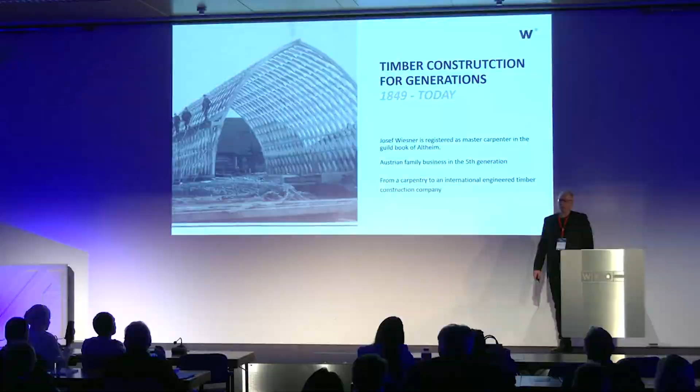We name ourselves the pioneers in timber engineering, simply because we are the pioneers in timber engineering. We've done that for 175 years, and we are now in the 5th generation. We started as a small carpentry, and now we act worldwide with the hugest, largest timber structures in the world. We are still in a small village in Austria, working from there and serving all around the world. We've always had the luck and the capability to make the most impressive timber structures in the world.

For instance, that one built in 1966. It's still existing. It's an exhibition hall in Klagenfurt, Austria, and it has a free span of 100 meters, which was for a long time the longest free span in timber structure in the world.

Then we made a lot of other new, crazy projects that you will see afterwards, which led to the decision to make a new line for our factory, because we realized timber goes also vertical since a few years. In former times we talked about long spans, huge sports halls, things like that. But since a few years you can make skyscrapers, high buildings made of timber, and that led to our decision to make a new line for this kind of product.

We have a quite holistic approach when we talk about timber construction. So we're not only a manufacturer, we help architects if they come with a sketch on a napkin and ask, Johannes, is that feasible? How much does that cost? We help them. And if that sketch looks at first very brave and almost impossible in timber, we are even more motivated. We like that. We like, in a positive way, naive architects who make their lines, and then the industry has to solve the problems, because if we always make what we already know we can, it's quite boring.

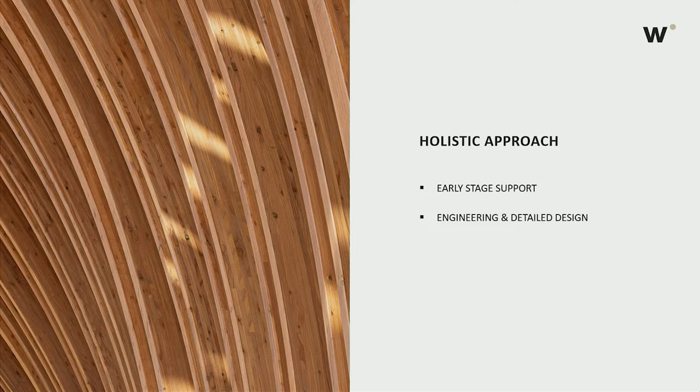It normally takes a few years from the first assistance to engineers or architects until we really secure the contract, the order. And once we have that, we do the full structural analysis. We have in-house engineering, 25 people working on the computer doing the structural analysis and the fabrication model. We manufacture the elements, handle project management, ship it wherever you want, and install it too. So that's just to give you a picture of what WIEHAG can do.

But why build in timber? We are in Austria, in Vienna. In Vienna there are probably not too many trees, you haven't seen too many, but 48% of the area of Austria is covered with trees, with forest. So that's a good base. And Johannes already talked about CO2 emissions and the building environment.

12% of the worldwide CO2 emissions come from building materials. That means it comes from cement and steel. So that's quite a lot, especially if you consider that all aviation, all airplanes, account for only 2 to 3%.

Of course, one solution would be to build less, as Johanna mentioned in the previous talk, and that's really a good idea—to refurb more and so on. But another possibility is to build in timber, because 1 cubic meter of glulam has a negative emission of 677 kilograms of CO2. So that minus is positive for the planet. The values for steel and concrete, even green concrete and green steel, are on the positive side with a plus, and much, much higher. So this is one trick for how you can save the planet in a way.

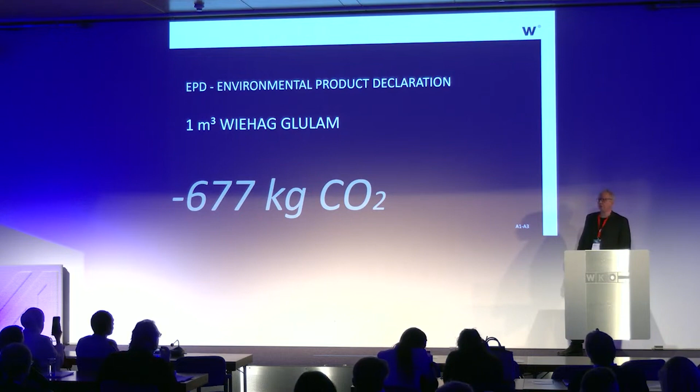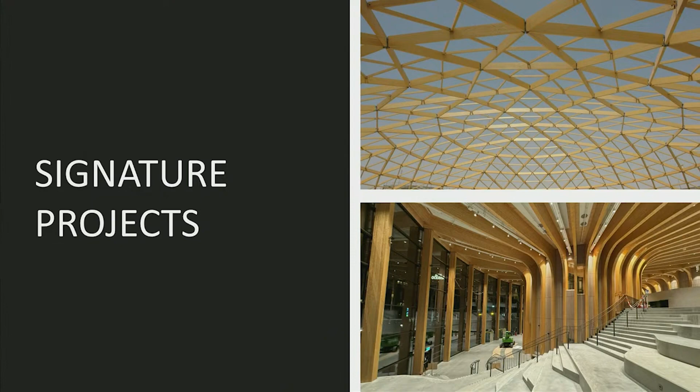Beside that, of course, there are many other reasons to build in timber, which you will see afterwards. It looks good, and you should feel good in a building. Nowadays, biophilic design is very common, so architects realize that the mood of people changes if the architecture changes, so you should live in a nice building, in a nice office, and other technical reasons.

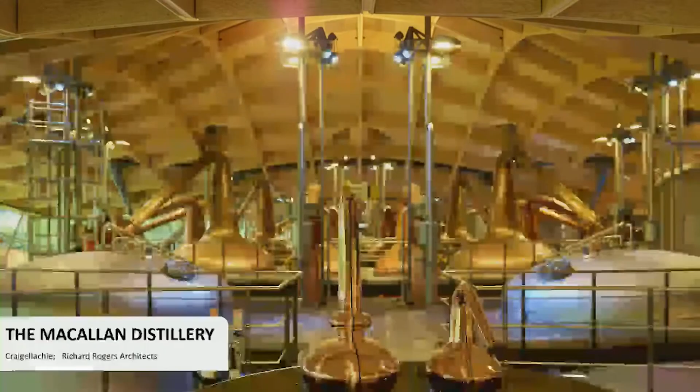But I'll lead you simply through a few projects for which we are famous. We call them the signature projects, like the Macallan Distillery. The Macallan whiskey is one of the most expensive whiskies in the world, and they decided to make a new building. They chose Pritzker Prize award-winning architect Richard Rogers to make that very, very complex roof. It's probably the most complex timber roof in the world. It's a real cathedral of whiskey, but also a cathedral of timber.

Whenever you're there, it's 1 hour to the west of Aberdeen. You can't miss it, it's the #1 visitor attraction already. It's hard to get the feeling over the slides here, but if you're there, don't miss it. It's really a wonderful masterpiece of timber.

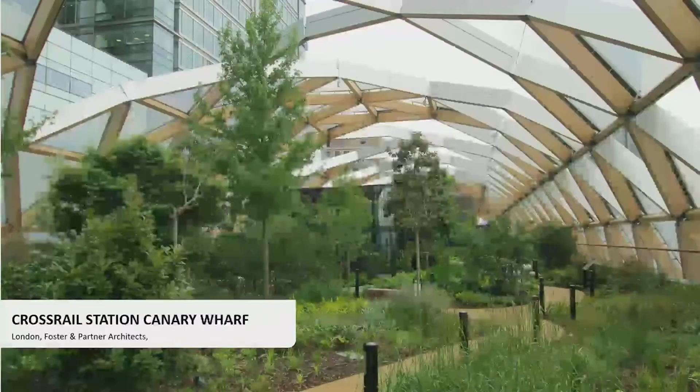We worked with Norman Foster on a very long structure, 300 meters long, in the center in Canary Wharf in London. It's a public building, so you can see it and walk it whenever you're in London. It's easy to access, and a beautiful combination of a landscape garden with an open timber roof.

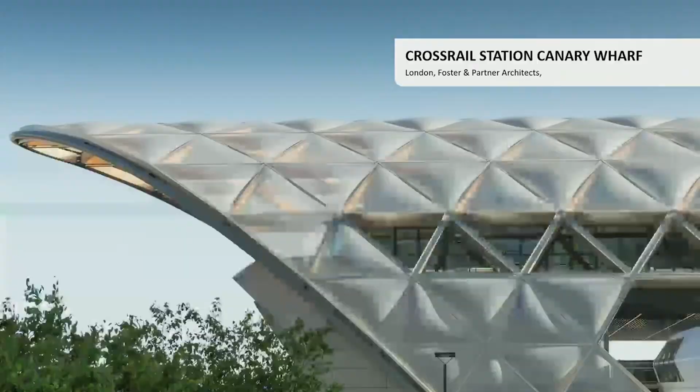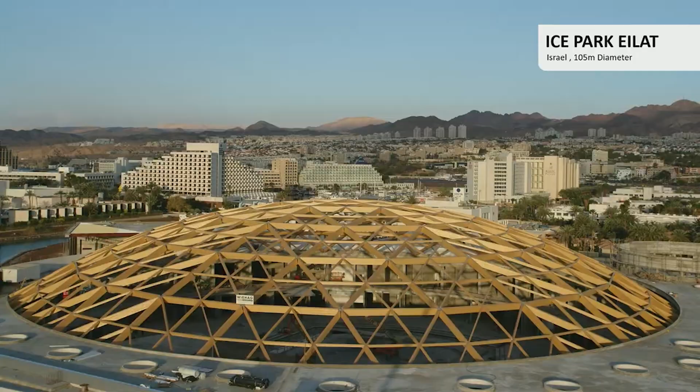We did also something in the Middle East. Once again, it's a record-breaking project, the longest and biggest timber building in the Middle East. It's a kind of shopping center and ice hall in the desert. It's a real amazing structure, 105-meter diameter span, a very efficient structure, just a very small amount of cubic meter per square meter, and also easy to ship because they're just a few or very short elements, so no troubles on the logistics. We worked a lot for many posh colleges like that one, for Eton College, where

it's simply important to be also sustainable and to have a good quality and a nice feeling inside. We worked with another star architect, Kengo Kuma, on the Hans Christian Andersen Museum in Odense, a very small one but very complex job where we proved again what's possible in timber.

Kengo Kuma has a quite nice quote. He says timber is mankind's oldest friend. Therefore, he likes to build very much in timber, and all of his projects are made in timber.

This is also quite a beautiful structure, the Freemen's School, with a kind of whitewash coating, a very neat and clean design. You don't see any steel parts, and you can see here the beauty and the very easy architectural trick or gadget of making a diagonal ridgeline gives that building simply a special character.

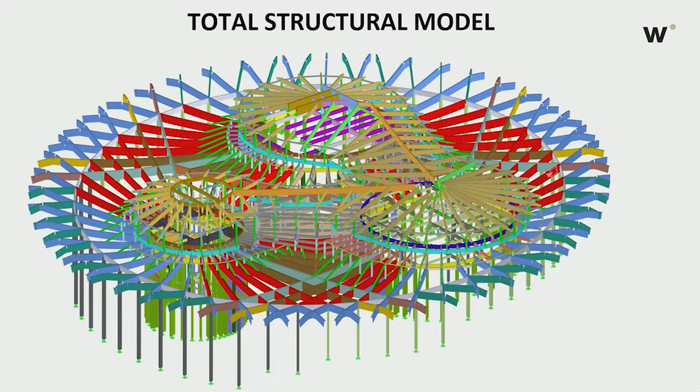Just to give an idea what we're able to do, this is a structural model where we had to prove that everything is stable enough, where we had to make our connections. 2 engineers worked on that for 2 years. In addition, 2 CAD people, so 2 draftsmen, worked for 2 years to make a fabrication model, which shows then every screw and every flitch.

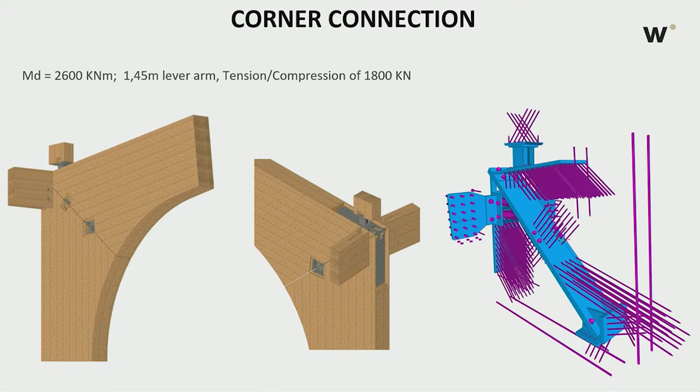Yeah, a few further pictures. You see that signature detail, I would say, a corner connection with very high forces inside. So timber design and timber engineering means also steel engineering, because you have to transfer high forces from timber to timber, and that doesn't work with a few screws from the DIY shop. You have to design it really, with very long screws and very heavy steel parts also. For instance, this is the most stressed connection, you don't see it really.

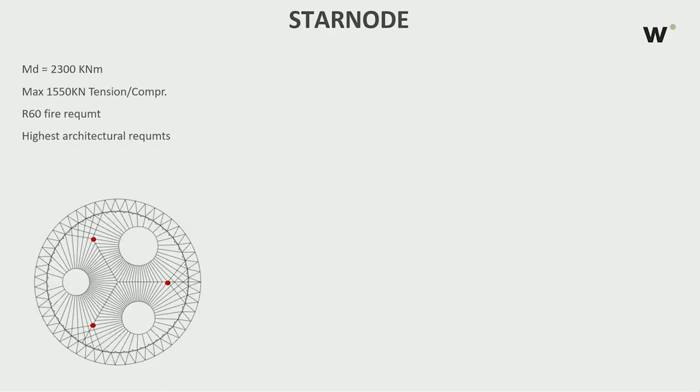The architect decided to leave at least a small square visible in steel, but inside is these 3 star nodes of that building. That turned out as a real beast. It looks like that, so really heavy connections, but that gives you simply the trust that you can make almost everything in timber, within reason.

Working with that celebrity architect, rock and roll architects, is a big honor, is good fun, but it means also no compromise. So if they want a shadow gap, they get a shadow gap. That's what we learned, but we still like to work with them, and it's really a big honor.

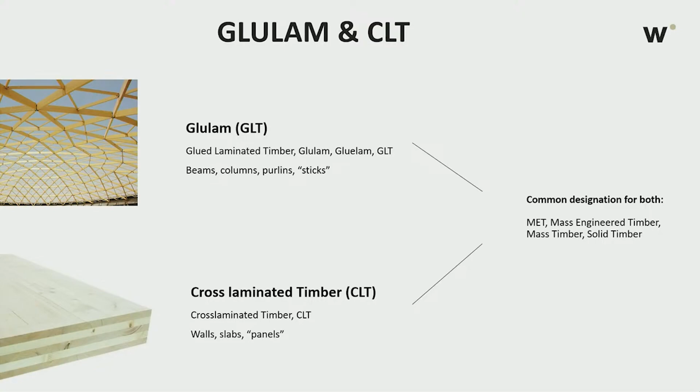To understand that, these high-rise buildings, multi-story buildings, need 2 elements. One is glued laminated timber, mainly used for sticks, meaning a column or a beam. The other is named cross-laminated timber, which is a panel, used for a wall or a slab. These 2 names are mixed quite often in the wrong way, and then you have names for these 2 items together - if you talk about mass timber, solid timber, mass engineered timber, then you mean both of them. Just a bit of education in the background.

I told you at the beginning that we are the pioneers. We proved that again - we built the first multi-story building in timber in 2007 already, many years ago. It was a building that looks like nowadays: it's a glulam column, a glulam beam, and a cross-laminated timber slab. The same system as nowadays high-rise buildings made of timber are done.

But then, 10 years, nothing happened. The world wasn't ready for that. Then around 2016, 17, architects and clients were ready, and now it's almost normal to build a timber building. It's always the first in Amsterdam, the first in Sydney, the highest there, the highest there. It's still a pioneering time, but there are now many samples around the globe.

We have done Australia's tallest office building in 2018 in Brisbane with 45 meters. Looks really great. It's a complete timber building, so even the staircase and the lift shafts are made of timber. And you see how that building looks like.

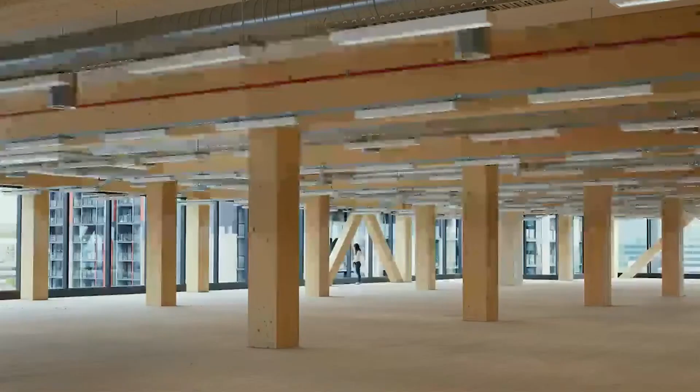Open mechanical and engineering services, normal grids, let's say 6 by 9 meters, similar as on steel or concrete. And that's how nowadays offices should look like, you know - bio-based material, fancy furniture, open spaces. In this kind of building, people want to go to the office at least for 3 days and be only 2 days in the home office.

So you need to attract your employees nowadays to come to the office. You can't do that in a very boring building.

We did also Asia's largest wooden building, again with a really huge amount of containers - more than roughly 400 sea containers were going to Singapore. You see that building.

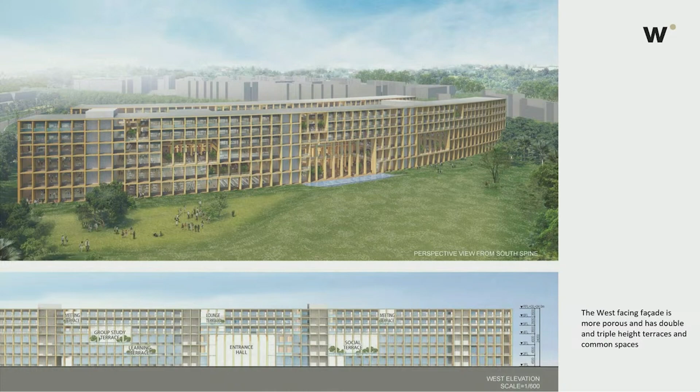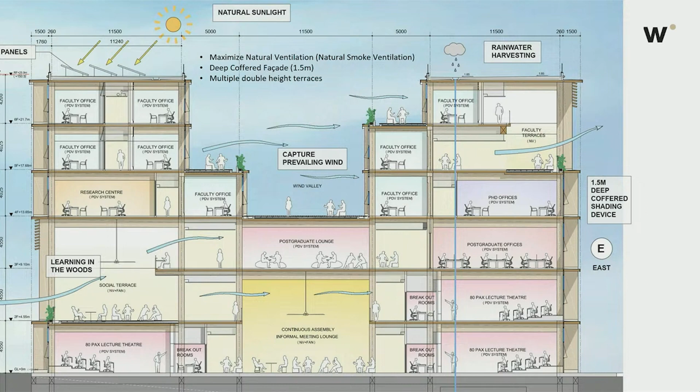It's only 6-story height, so not really tall, but really huge in the shape of a crescent. It's also quite ecological from the structure itself, with a lot of natural ventilation so the wind can go through the building. You have a lot of open spaces, designed by another rock and roll architect, Toyo Ito from Japan. And of course PV, rainwater harvesting, grey water reuse, and all these usual things you have nowadays on a sustainable building. It will be awarded today evening here for the Austrian Green Planet Building Technology Award. We are proud that this is another award for that building. By the way, all these buildings receive a lot of awards in different categories in different countries.

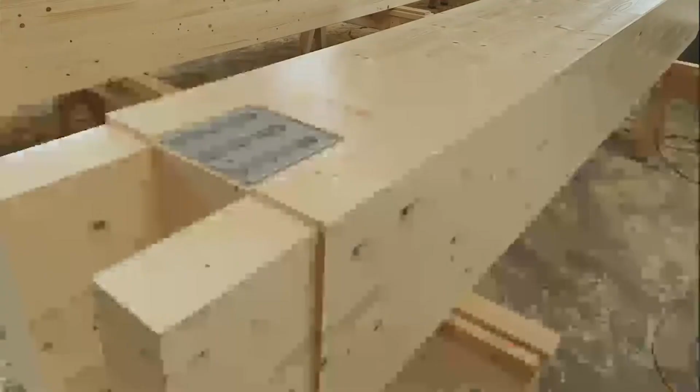That's how a typical timber column looks from a close-up in our factory. So it's still not furniture, you know, it's a structural element. It can be rough, but it must be very exact. It must be very precise, plus or minus 1 millimeter, because everything has to fit together. And the surface, of course, is also with a kind of aqua varnish, but not a lacquer. But just to give you an idea how these things look from the factory.

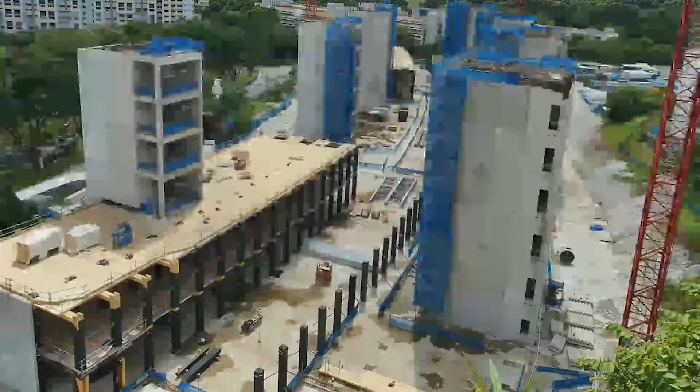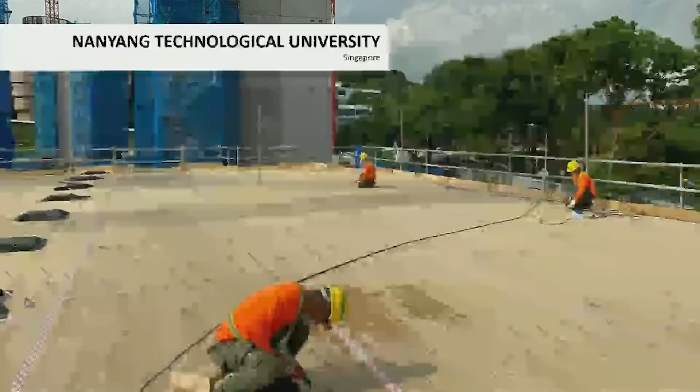This is the typical style of a timber high-rise building nowadays. It makes sense to make staircases and lift shafts in concrete. That gives a bit more lateral stability, especially as you go higher up. But all the vertical load path is done by timber columns, beams, and cross-laminated timber slabs. You see here a lot of screws are required to achieve the diaphragm action of the CLT slabs.

And here we celebrated - I think that was the last container going to Singapore. It was during the pandemic, so we had COVID outbreaks on the ships. We were in the middle of the Suez Canal blocking, so it all took a bit longer than we thought. But at the end, everybody was happy and it was a great result. Just a few pictures from that building here - you see those open spaces, some are double-story height, and a real good look and especially a good feeling for the students if they're there.

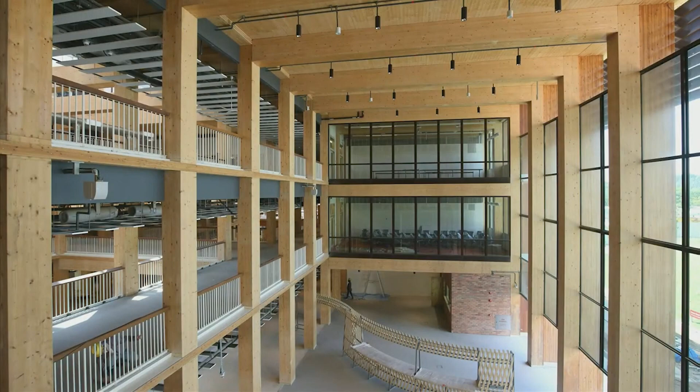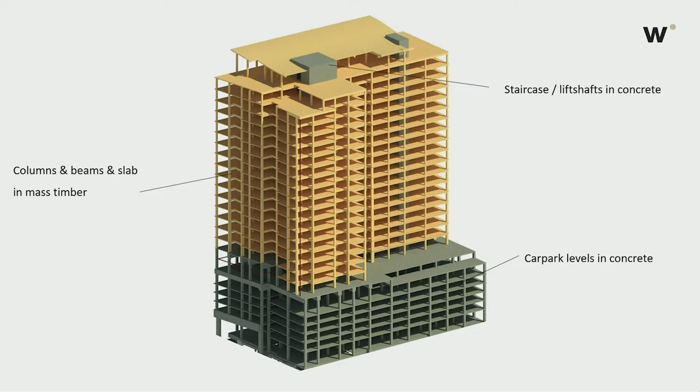We also did the tallest timber tower in the world so far, at 88 meters. It's very high in timber, not high if you compare it to a 500 meter skyscraper somewhere in Abu Dhabi, but in timber it's really high - 19 stories of timber. Again, a bit hybrid: the park deck is made of concrete, then you have 19 levels of timber, and the staircases are also in concrete. As said, a very rational, sensible system of building nowadays.

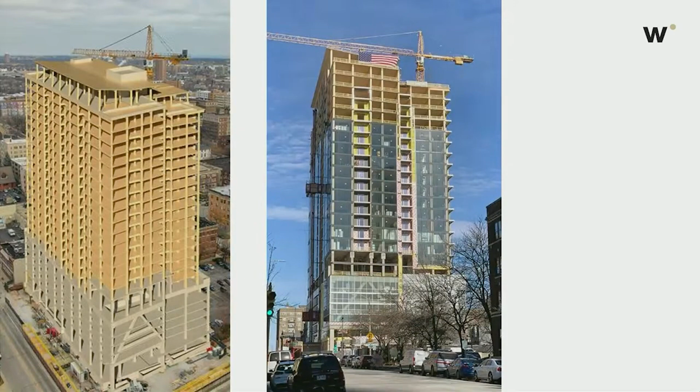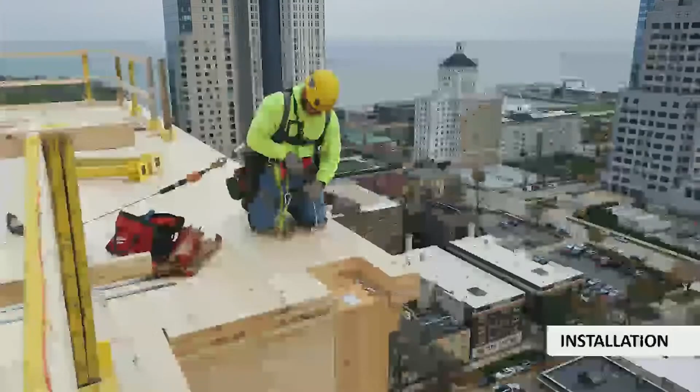You see the rendering on the left-hand side and some way through the construction stage on the right-hand side. That's how it looks normally during the construction phase. So you have to temporarily prop the columns, you have to take care about temporary water management - therefore you see that yellow sealing on the connections of the different panels. And we have to get used to pictures like that - carpenters are working not only at 8 and 9 meter height, but really working at 100 meter height over the skyline of any city in the world.

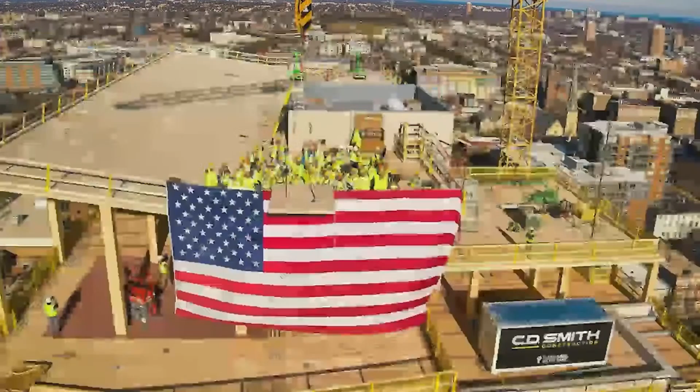Of course they celebrated very much the topping out party in Milwaukee. And it's already finished - you can even book a room via booking.com there. It's an apartment building, but some are rented for tourism. So really a nice building. There is a kind of authority, like referees looking over the match, who determine who has done the highest building in all categories, also in the traditional steel and concrete. And so they got the certificate for the highest timber hybrid building so far.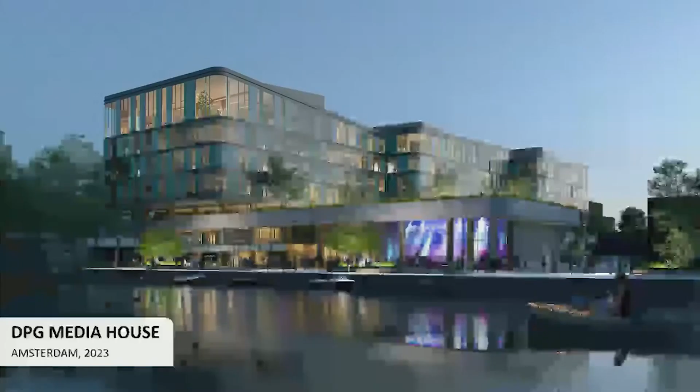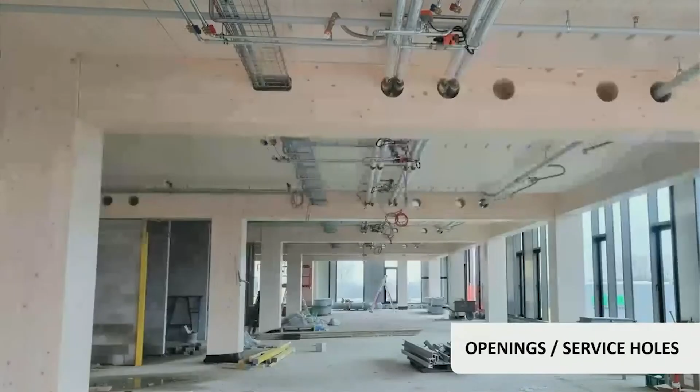We did a nice one also in Amsterdam, finished 2 years ago - 25,000 square meters for a media house close to the water, as everything is in Amsterdam. They are just going in and starting to run that office. That's also one picture of that building. I always tell the architects and clients, don't make a Swiss cheese out of our glulam, but they don't listen very often. So it's always better to have the M&E above in a raised access floor or underneath the beams. But if they want it through the beams, it's possible - it simply costs a bit more money.

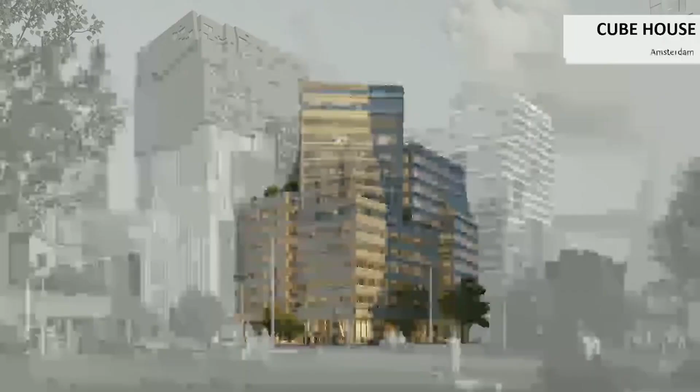The next one we will do in Amsterdam quite shortly is the Cube House, a nice, sexy corner building in Zuidas, part of Amsterdam. They all look quite similar from the structure: a few stories in concrete, staircases in concrete, and the rest completely in timber. So you can save a lot of CO2 emissions by making this hybrid system.

And these are the usual keywords, also for the Cube House that you see in all these buildings: bio-based material, any BREEAM, LEED, whatever certificate, excellent, gold, platinum, Paris-proof, a rooftop garden, reuse of grey water system. So all these buildings try to tick all the boxes, and by choosing timber, you simply have it easier to achieve all the targets.

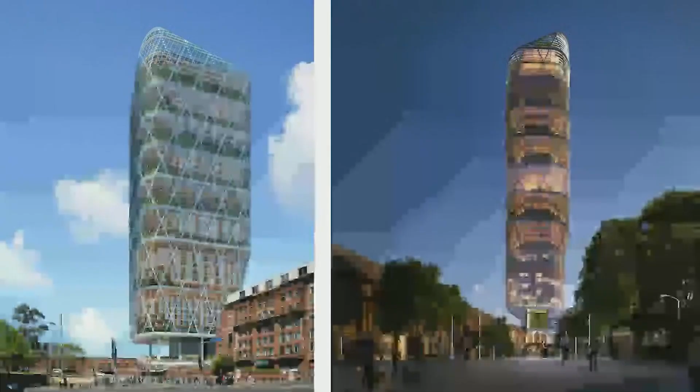And that's the next world's tallest timber tower, also done by us. We are currently in the design phase. It's a big step from 88 meters to 182 meters. It's the Atlassian Tower in Sydney, a real timber needle in the sky, where you see it's again quite hybrid, even with some mega floors. So the timber here is not the limiting element. You could build it also 500 meters because the primary structure is still steel and concrete.

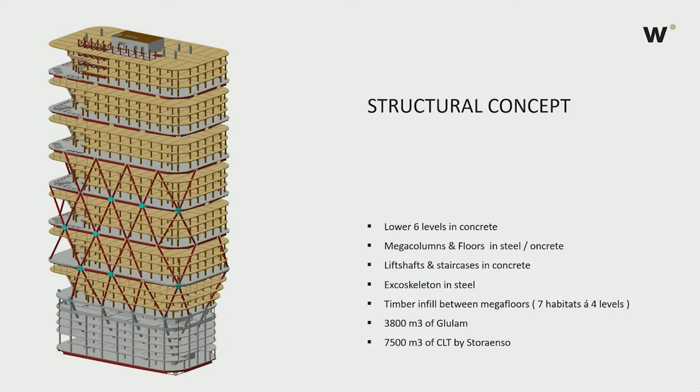And then you fill in 4 or 5 levels always in timber. So the amount of timber is still very massive, a lot of timber, but it's not a stability problem. And I end with a few pictures of that project so you can imagine what the future brings, what is possible. I hope I opened your eyes a bit, that you realize now what can be done in timber. As said, it's just one way to save the planet, but it's a good way, an easy way, and we and the rest of the timber industry are ready for that.

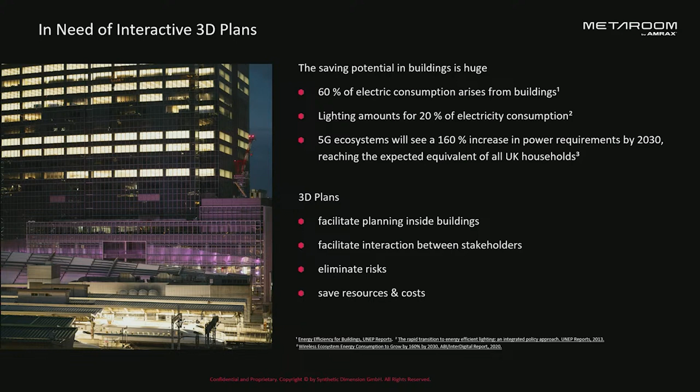And what's also something we don't see but is surrounding us everywhere is wireless - 5G private networks, access points, they also consume a large amount of energy. And for all of these things, we need 3D data to plan them. For some, we just need 3D data because we can do it more efficiently, but there are also parts where we need 3D data to do it in a regulatory right way. For example, there is a regulation to do light planning in Europe, and you need 3D data to do it. So for light planning, it increases efficiency to have 3D data, and the EU is also doing a lot on the regulatory segment to improve this.

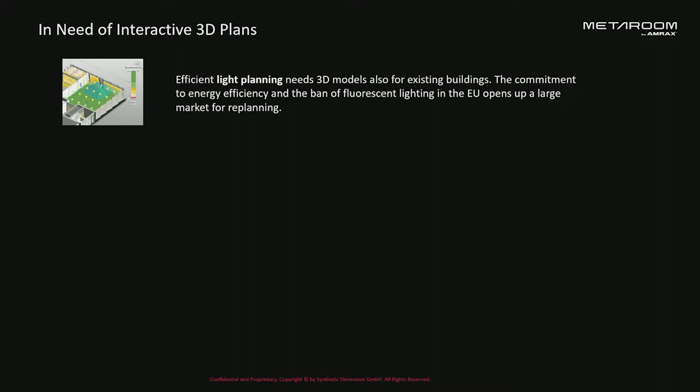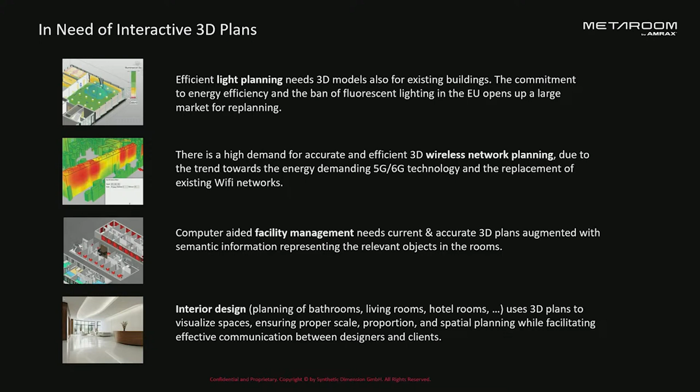The second thing I want to dig into a little bit is 5G, 6G technology, and why we need 3D data to plan this out. Also, facility management is coming more and more into the 3D space. We are working with a company in Switzerland, and actually they are losing 6,000 chairs every year. No one knows how this happens - I mean, they're not stolen, they're somewhere, but they are lost in the system. So they want to track it. And also, of course, there is this huge part of interior design that also goes into existing buildings.

Now, we've heard about the building information model. The building information model is a regulatory standard. Actually, two weeks ago, the IFC 4.3 format has officially become an ISO standard. So there is good news, there is a data standard for buildings. And everything we do, I think the global digital environment around architecture, engineering, construction, will go more and more into building information model.

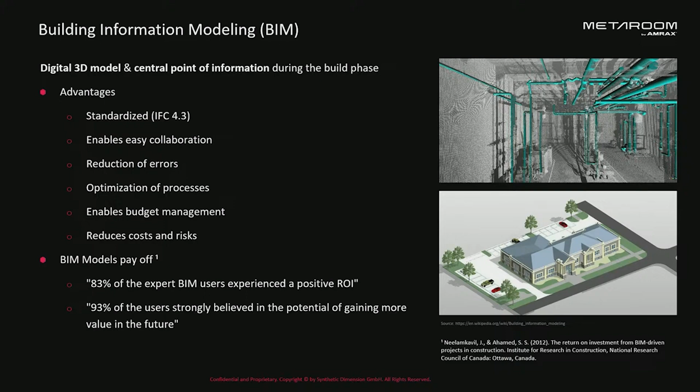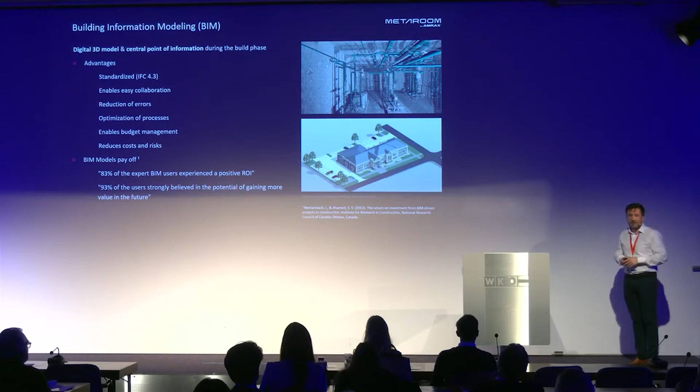When we look at, for example, a country like Norway, we do see already coverage of 50% of building information model when it comes to buildings. There are no exact numbers about the DACH region, but I would say from the numbers you hear on the market, it's maybe 5 to 6% of buildings that are planned out with building information model. So this comes more and more, I think.

For sure, you have also heard about digital twins. This is something that can build on top of 3D data. The difference here, from a specification or standard view, is you would say it's a virtual representation of a physical object. It's also now standardized in ISO, and it says it has to be updated with real-time data. So that's a little bit the difference to 3D data. It's updated with IoT.

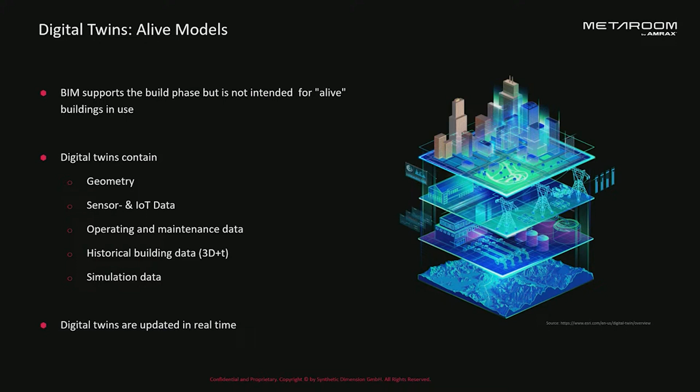We don't see too much here in the market. I think it's more kind of a concept. We see a lot of big companies talking about digital twin, but I think what we really see on the field is still very low. There are maybe some lighthouse projects, and it also builds on top of 3D and building information model.

Yeah, this is a picture, and sometimes I remember these COVID times where everything was about the metaverse, also Facebook renamed and all of these things. It was even, I think, in the Zeit or Bild at some point, asking what's the metaverse? I don't see any kind of movement into this anymore when it comes to building and 3D.

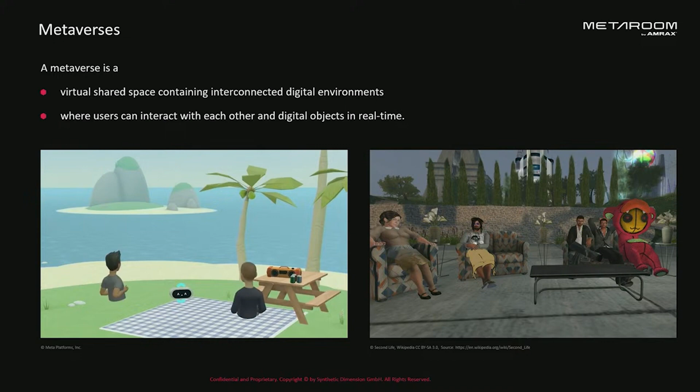But what we see is that a couple of companies are promoting the industrial metaverse. This would be something like Omniverse from NVIDIA. Also, I think Siemens is talking a little bit about this. If you take a look at it in terms of layers, it would be 3D, then building information model, then digital twin. And if you connect more digital twins and work with many of them in a digital space, then this would be the industrial metaverse. Also more applied to factories today, I would say.

So this was more the theory part, just to make sure that we're all on the same page. The opportunities and the challenges when it comes to 3D data in buildings are quite high, I would say. So opportunities are high, but also the challenges are high.

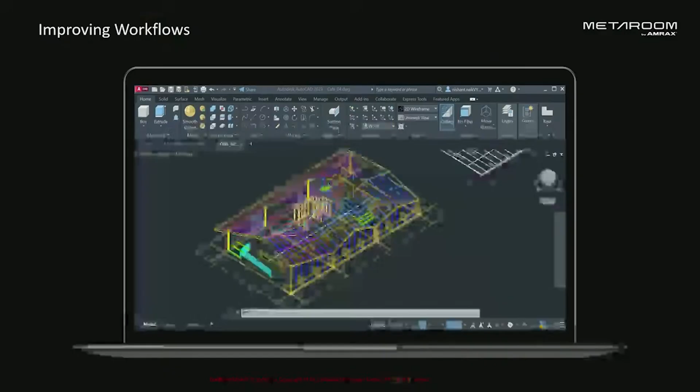When we take a look at improving workflows, and Joanna has talked about this complexity, when we do a 3D model of an existing building, in many ways it looks a little bit like this. So we have like 1,000 icons, and it's expert work to do it. To go into this digital world is, in many cases, very complex expert work. And I want to talk a little bit about how we can simplify this, and what's maybe also the future of this technology.

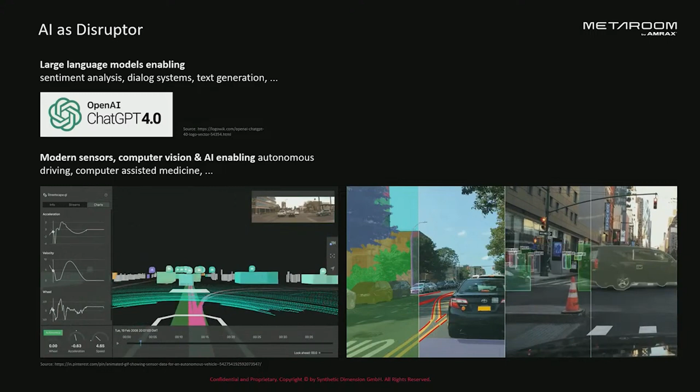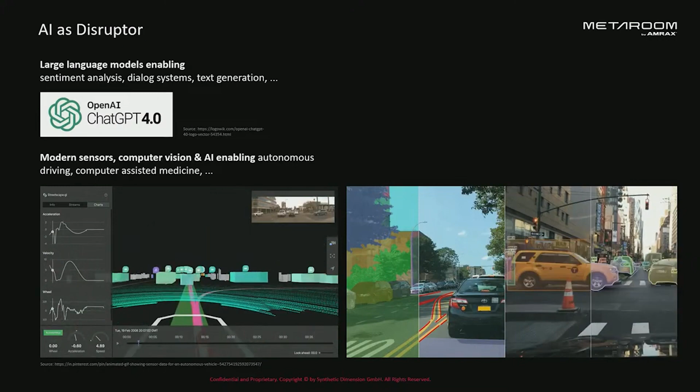And what helps us here is AI. AI has not only made tremendous jumps forward when it comes to large language models. Probably every one of you knows ChatGPT and is even using it for daily work. But also when it comes to computer vision and the understanding of 2D and 3D space, it's been going for the last 20 years and is driven a lot by autopilots from cars, but also many other industries. How can we understand the world around us better using AI? And everything you will see after this slide is basically based on AI.

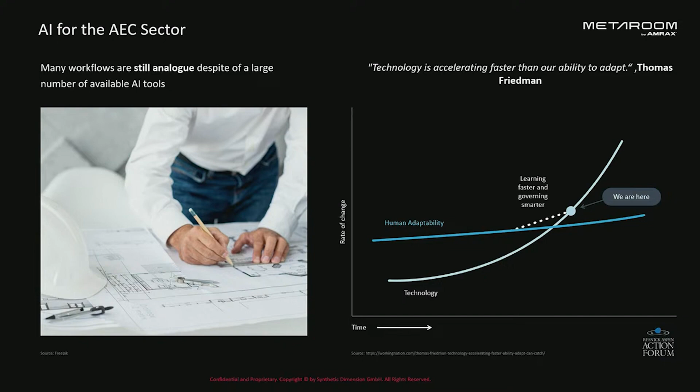Now, but this also brings up a pretty interesting problem. There is a homepage called AI in AEC, so AI in architecture, engineering, construction. And there is a list of AI-based tools. Today, I just looked it up before the presentation, there were 1,057 AI-based tools for this industry. So who can use this? No one of us has the time to dig into more than 1,000 AI-based tools.

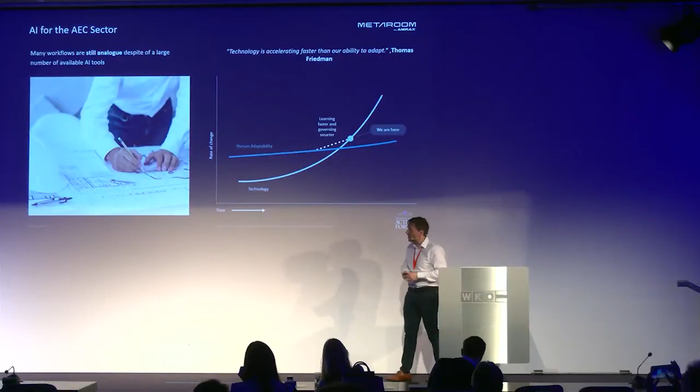So a large amount of companies are also now popping up, building on top of AI products, like layouting or add-ons to AutoCAD and Revit and things like this. It feels a little bit like on the right side, the technology is moving so fast, it's very hard to catch up.

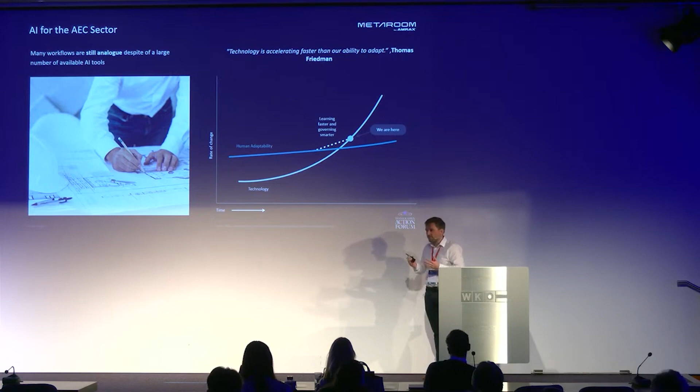So every day 10 new tools pop up, and how can you even catch up as a human being with limited time? I think there will be some kind of consolidation. There won't be 100 layout tools, maybe there will be 2 or 3 that are really good. But what we see today is kind of an explosion in AI tools around this.

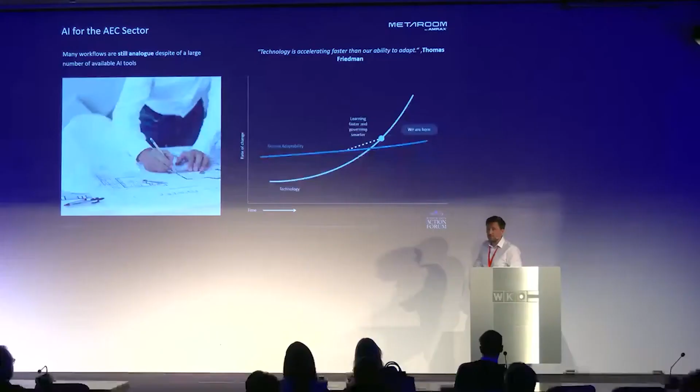One of these tools I want to show you today, our company has been working on this for 4 years. It's an AI-based 3D capture that not only captures the geometry of a room, but also has spatial understanding. If you move the mobile phone around, it will automatically identify parametric models and parametric surfaces. It won't just understand the geometry, it will also understand what's a window, what's a table, what's a chair.

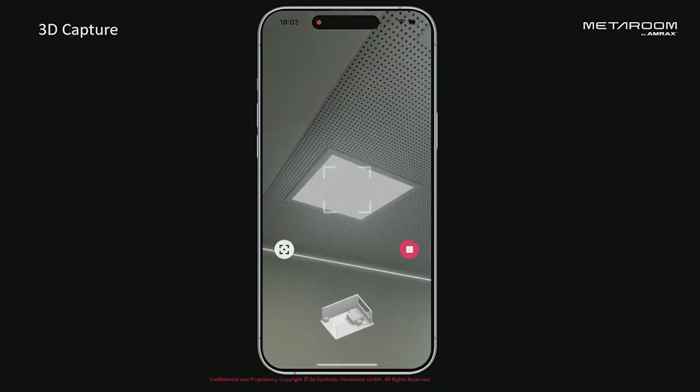This technology will help us a lot in the future to get plans out of buildings that already exist. The use case we're doing here in this video is actually for light planning. So for light planning, ceiling elements are also important, so we can take a look at them and additionally book them into our 3D model.

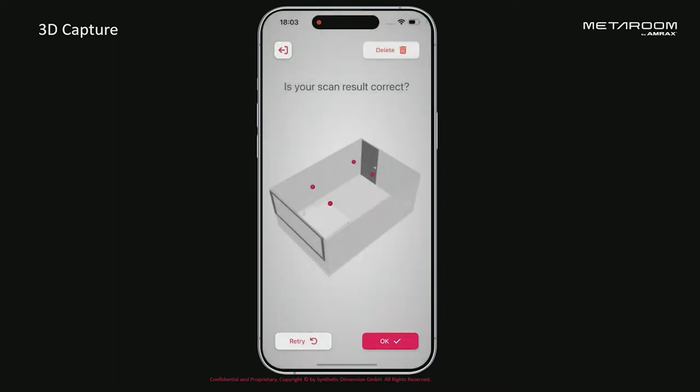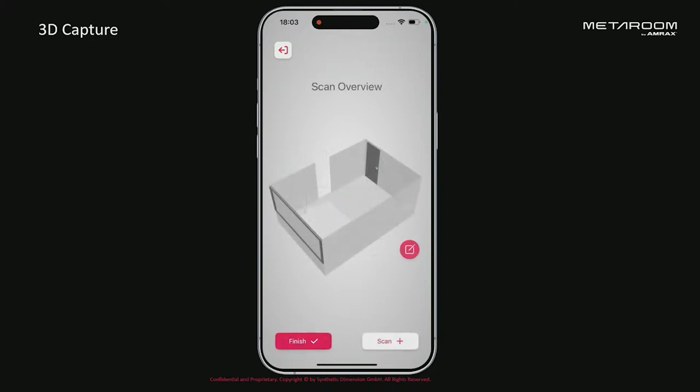By the way, everything you see here in this screen recording is only for user guidance. The final model will be calculated after we finish the scan. Now we click stop and we receive an intermediate result of this room, and we can take a look at it. It will ask us, did we capture everything? And these 4 dots here are the 4 light positions of this room.

Now, this is only one room, and it's a very simple room. But what's also possible today is we can just continue the scan and go to the next office, and add another scan segment. Basically, this is today unlimited in horizontal and also vertical space, so you can build up a complete model of a building just using a phone.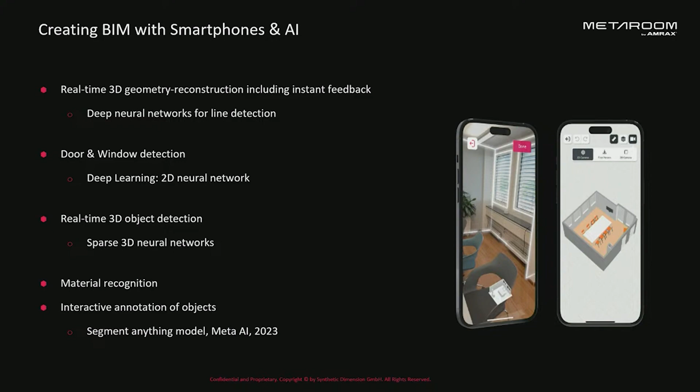So everything you've seen here is working very close to an autopilot of a car. Sometimes when people look at AI it feels a little bit like magic, or it's very hard to understand what's happening. It's very similar to autopilot in cars - it's a lot of different small AIs that are very good at understanding one specific thing.

For example, one AI is just looking for doors and windows. Another AI is looking for chairs. A third AI is looking for colors. And a fourth AI is looking to get the basic understanding of the room. So if you add all of these things together, you end up with a complete understanding of the room.

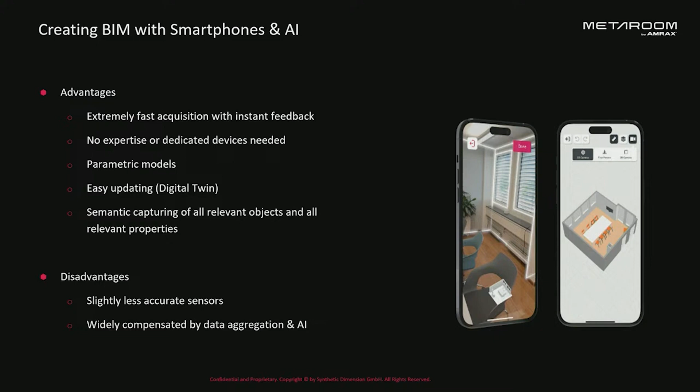Now, 3D capture has been around for, I'd say, 20 years. You can do it with big laser scanners and then do a reconstruction on Autodesk Revit or something like this. The difference with this technology is that everyone can do it - there's no kind of onboarding and no expert training needed. This can be downloaded from an app store, and people use it from the very first second.

And they can create data. I like this a lot because it democratizes something that has basically been closed to a very small group of people who have been able to work with this expert equipment, and now every one of us can do it. I think this brings a lot of good into these industries.

We can see it a little bit here in this picture, and sometimes this reminds me of what we saw with cameras 20 years ago. I remember being at, I think at that time it was MediaMarkt, and you go in there and see all of these high-end analog cameras, and these early stage digital cameras. At that time, everyone laughed about digital cameras because they were just bad. Now, 20 years later, you can take a picture with an iPhone or Android phone, and due to software, the quality of the pictures that come out is even better than with analog cameras.

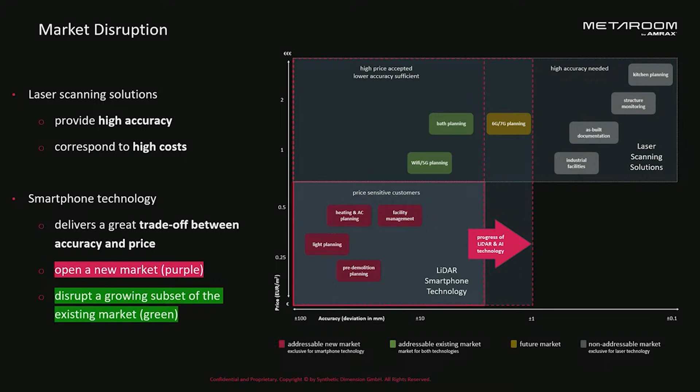So that's quite crazy, and exactly the same thing is happening with 3D understanding. There are some use cases already where we focus on areas where accuracy is not super important. But if we go into bath planning and kitchen planning, where we need sub-millimeter precision, this technology isn't there today. But we can see that from year to year, this becomes better and better.

Actually, when we started 4 years ago, the accuracy was around 20 centimeters from wall to wall. Today, we're already at 2 to 3 centimeters. It just improved so much in 4 years. If we go into this linear direction and project this into the future, we already know today that in 10 years, this technology will pretty much cover everything.

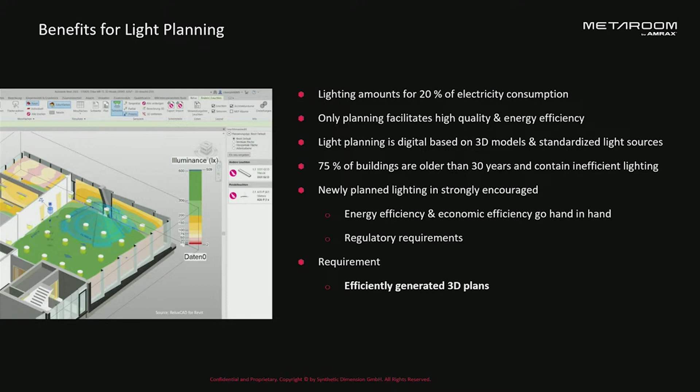In the light planning business, we are using this a lot. More than 90% of the light planning companies in Europe are already using this to do 3D plans in light refurbishment projects.

Here is one example. This is an object that is 60 meters in length and 25 meters in width, and it has been scanned only using a mobile phone. It took around 20 minutes to do it. It's 2 stories, and it was done in 3 scan segments, but everything has been built up automatically, just using an automatic AI pipeline.

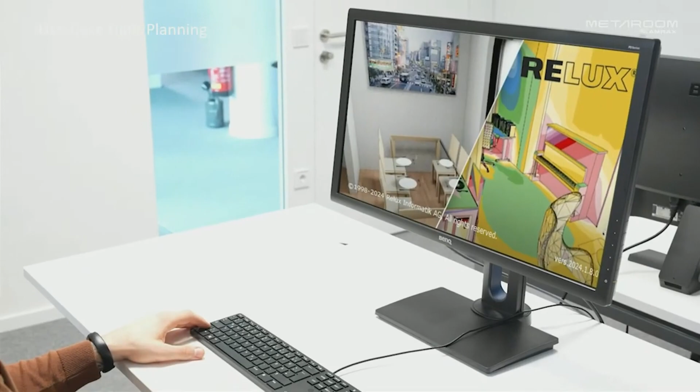This is quite a complex building, as it is not very standardized. It's pretty old and has a lot of old components in it.

Once we have this digital model done, we have a digital library of luminaires, and we can put the luminaires into this digital building. One minute after the scan, we can see a picture like this. We already have a color map of natural and artificial light, and we can also do renderings to show the owner what this light will look like in this building, and also how it saves a lot of energy.

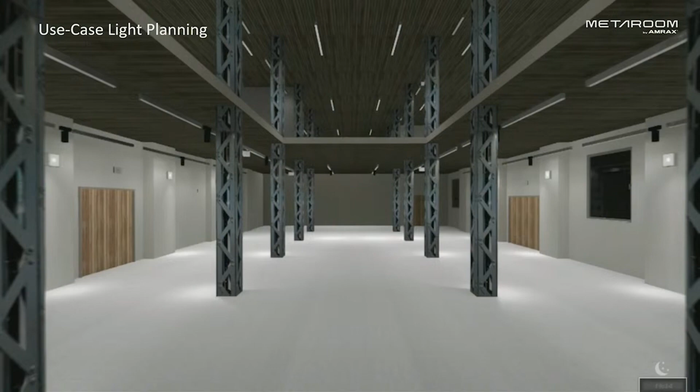Another thing is that we are moving more and more into 5G, 6G, and 7G. Typically, when we talk about these technologies, people think more about the outside of buildings, the antennas covering whole cities, but actually the technology is moving more and more to the inside of buildings.

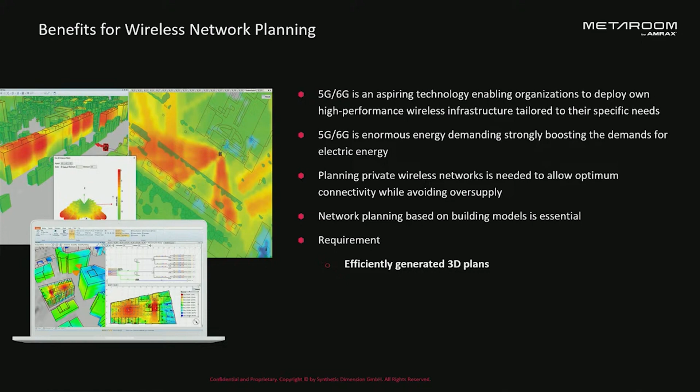So we are talking more about 5G private networks, and probably most of your phones are already capable of replacing Wi-Fi with 5G private networks. In the future, we will have more and more 5G connections instead of Wi-Fi, because it's just more efficient to put one antenna on top of a building than have hundreds of small antennas inside every building.

And I think all of you know there is always the spot where the Wi-Fi is bad. This will be solved with this kind of technology. But it also comes with a problem.

5G and 6G is based on a technology named beamforming. What the antenna does in real time is find your phone and focus the beam directly on it. To do that, it needs understanding of the interior of the building. So 3D plans for 5G, 6G, 7G of the internal aspects of buildings will become more and more important. This is something we are working on with quite a few companies already, globally.

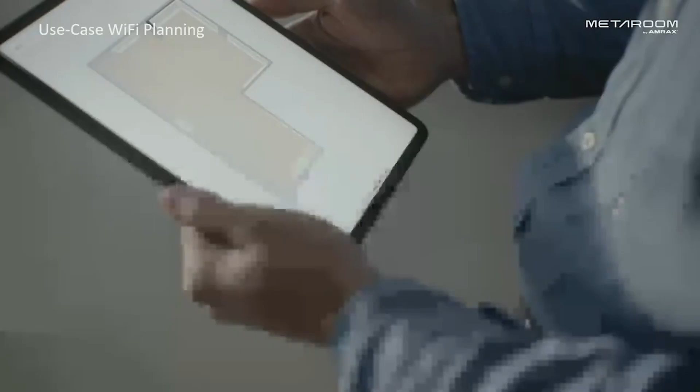This is an object, I think also in Salzburg, where we did a scan with this mobile application. It's a multi-floor scan, you can see it here. It has around 2,000 square meters.

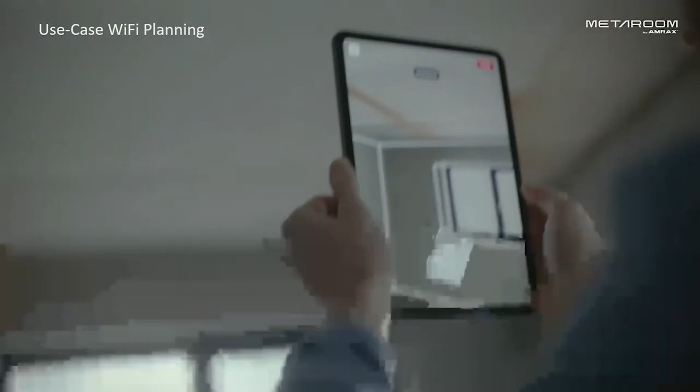After the scan, we generate a new kind of model that is perfect for wireless planning, and we give this data to another software where the radio planning can be done. We will see the result soon.

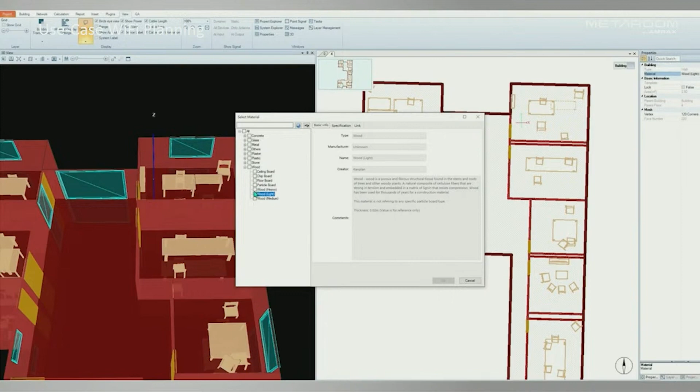We just import, again, a building information model based on IFC data. Then you can put your access points and Wi-Fi components into this automatically generated 3D plan, and you can already see the coverage and improve it if there is refurbishment work.

The last use case I want to show you is facility management. This is also new territory for us, as most of the facility management software used out there is based on 2D plans.

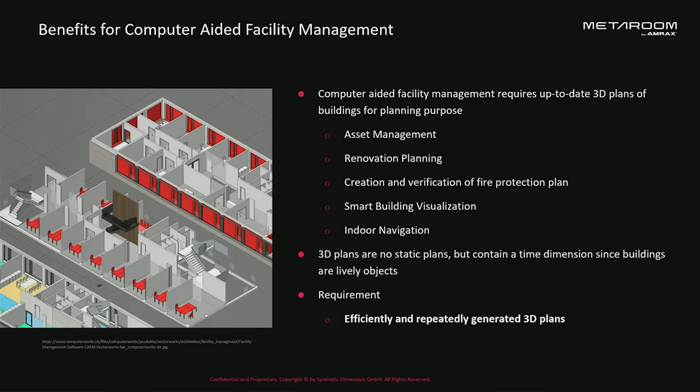But what we see is that this kind of software is moving more and more into the 3D environment, because it's a lot easier to find assets and also do calculations relevant for asset management and facility management on the basis of these models. We are also involved in some pilot projects in this area.

That's pretty much what I wanted to show you today. So it's a sneak peek into the future, but it's already available today. It's something in between, I would say.